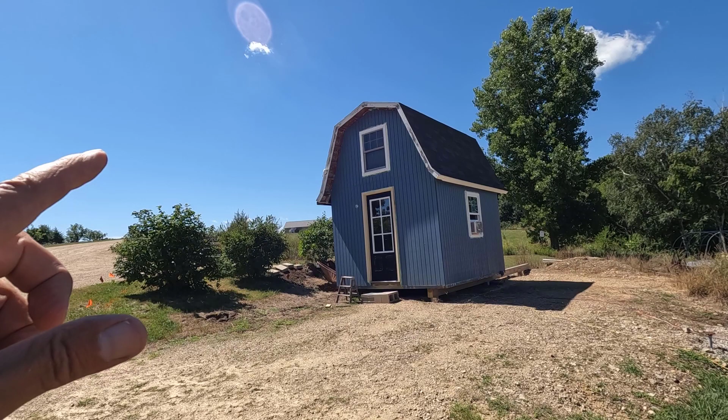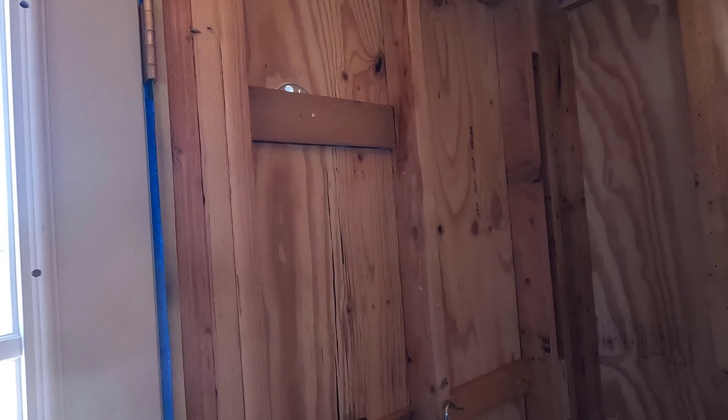Today is day 2 of the wiring of the lower level south wall of the tiny house remodel. Got the porch light wiring done yesterday, in case you missed that video. That's one of the things we're going to work on today.

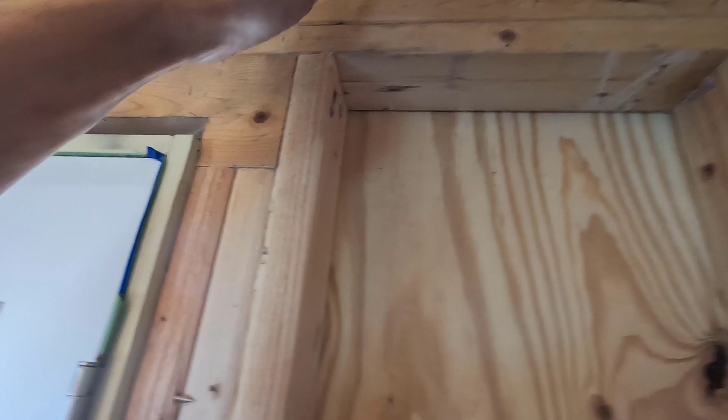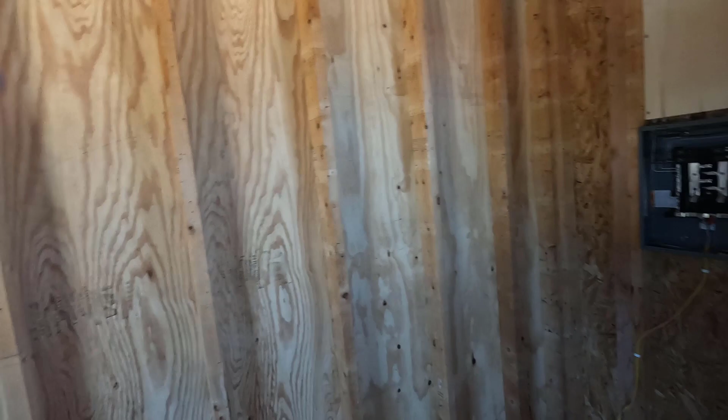We're going to get a wire through there, get it tightened down, and then go up and through into this upper area, and then that'll go over and down to a switch here. I believe that's the first thing I'm going to start with. I may, actually, all of this stuff right here was for locating this hole right here.

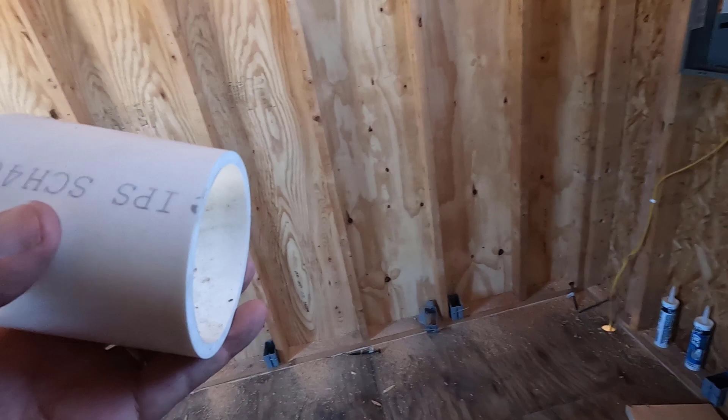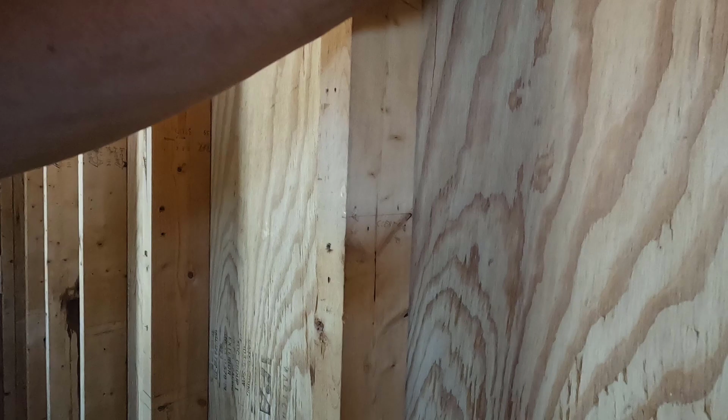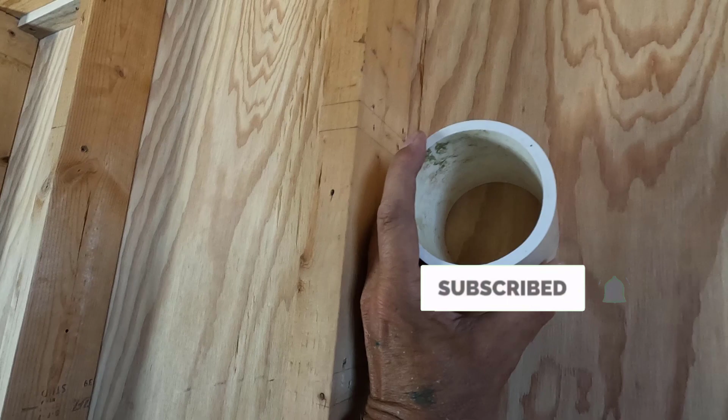And what I'm going to do, I've done this in the house before, is glue this to the wall. This is cut at 5 degrees on either end, and if it's put in there right with this text kind of level, when it's put in there, all I got to do is drill a hole through to the outside,

and then once this is fastened in place, I'll be able to take a router on the outside and route that out with a flush trim bit, and then I'll drywall over it on the inside, poke a hole in there, and use a roto zip to zip the hole on this side, and then I'll have a perfect passageway for all of the mini split plumbing and stuff.

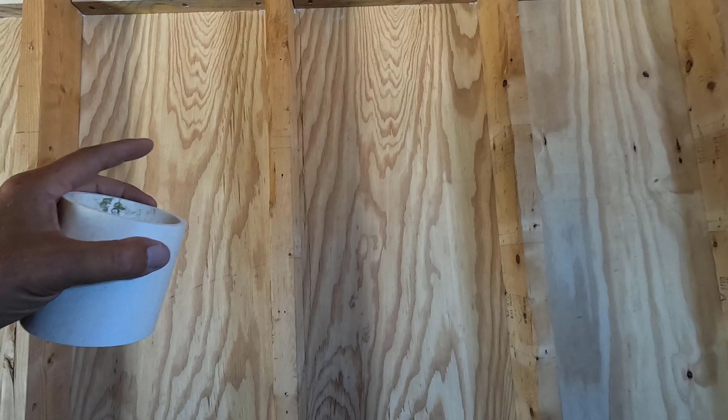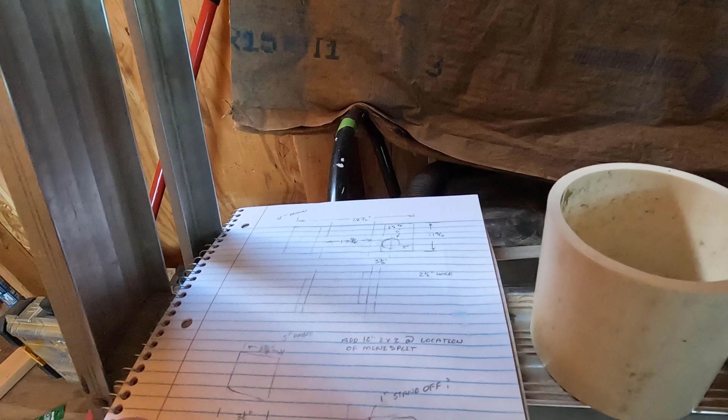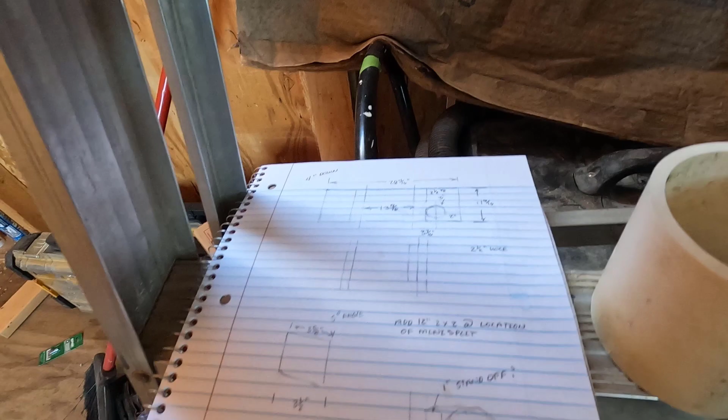I have the brackets figured out as well. I'm not sure if you'll be able to see this or not. Where did I draw that? I'm gonna have to beef up one of the studs and then add some blocking for this. Yeah, we got 13. So yeah, I'll have to figure this out again. I drew this up last night. I got this cut this morning. Figure this out again, and we'll get these blocks in place.

I gotta measure down from where the ceiling is gonna be. It has to be at least 4 inches from the ceiling, and for some reason they never make these mounting plates for a mini split so that the holes are 16 or 24 on center. So I'll add this onto one of the pieces, and then I believe I have to add it onto this side, and then on this side I have to add in these right here.

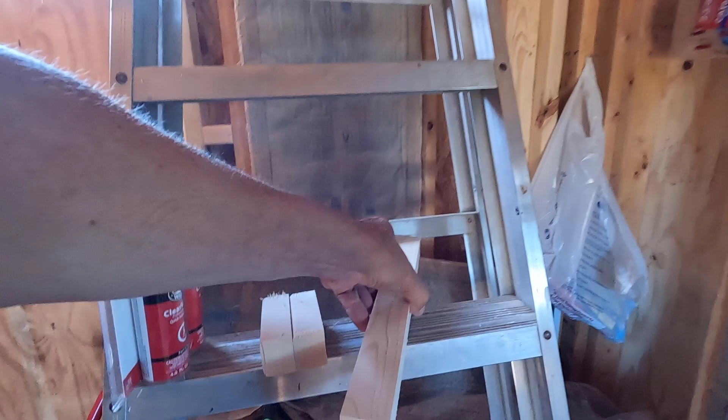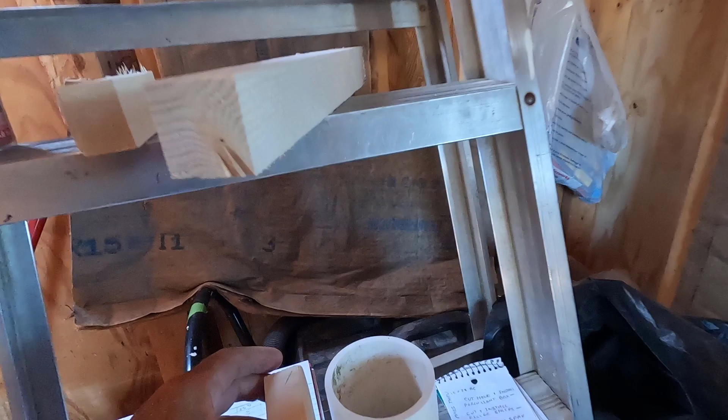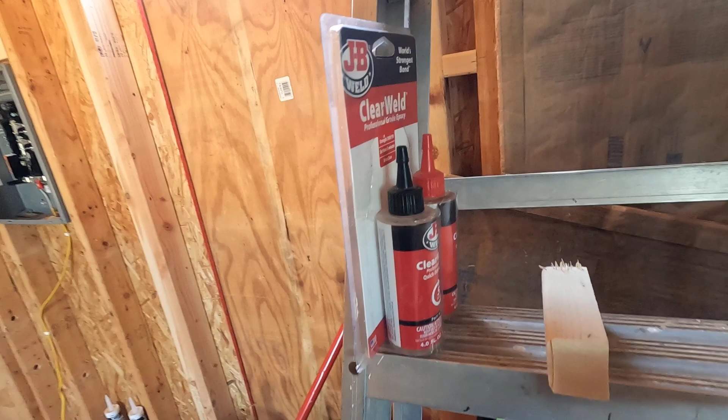These are 1 inch, like that, and then my pipe is going to go right on the edge of that, and I'll throw some strap around it. I'm going to glue it with JB Weld Clear Weld glue. It's just 5-minute epoxy, really strong 5-minute epoxy, and with any luck this won't take too long. This is pretty complicated, so yeah, we'll just do that first.

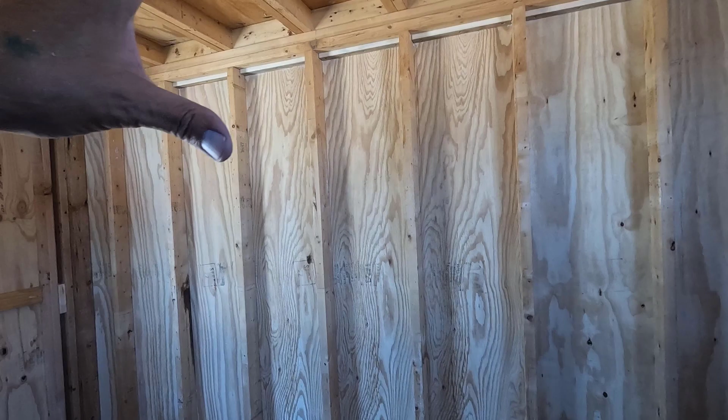We'll get the mini split stuff in place, then we'll do the wiring there. Once all of that stuff's done, I could start pulling wire. I got everything drilled yesterday, so I'll pull the wire, get the boxes in place, and oh, I actually have to get these big legs in place. I got a lot to do today. Alright, let's start by figuring out exactly where this mini split's gonna go and get those blocks put in place.

Okay, I got this all done. These are beef ups for the screw pattern on the bracket. The bracket will come to right about here, and well, actually it might even come past here. That'll be on the drywall though, but the hole centers on this particular bracket, that would be one of the hole centers right there, and they're in a line going upwards.

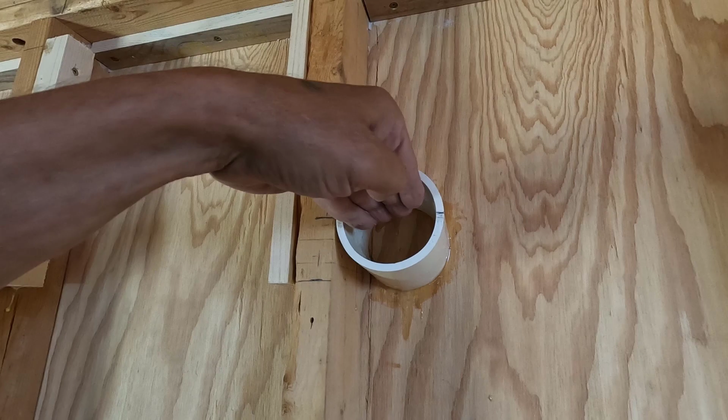And the other one is right at the edge of this 1x material, and we have kind of a messed up stud here, but it's going to work just fine anyways. And then this is the hole where everything goes out. This I'm going to let dry for a couple days. It's 5-minute epoxy, but it gets to full strength, I believe, after 24 hours, but there's no reason to cut the hole yet. So I'm gonna wait till tomorrow or the day after.

And what I'll do is just take a spade bit, drill a hole through the wall from the inside, and then go to the outside, use a flush trim bit, and then just run it around the edge. Then I'll have a perfect hole on the outside. I believe I said this already, but just to reiterate, that'll cut all that glue and all that stuff as well. I'll take some sandpaper and make sure all the edges are nice and smooth,

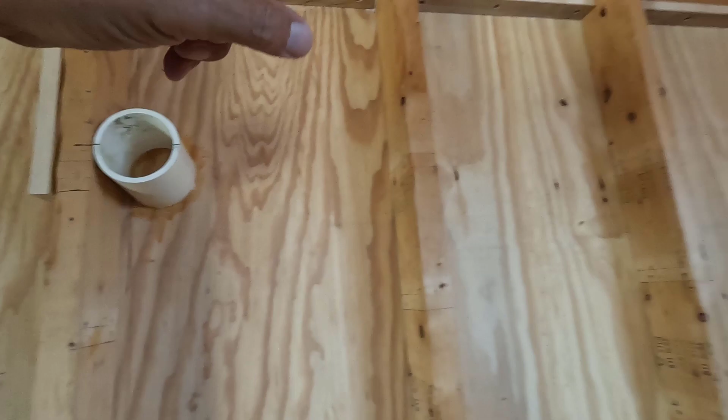get that repainted with the color from the outside, and then once we cover the wall, I'll just take a measurement from where the wall's gonna be, the drywall on one side and the ceiling, and then with those two measurements, I'll drill a hole right through here and then use a roto zip to zip that out. Then I'll have a perfect passage through the wall, and I don't have to worry about insulation, all that other stuff. I'll insulate with foam in these two areas, and then my batt insulation, I'll put that right around this. I'll cut it rounded like that, and it's gonna fit nice and tight.

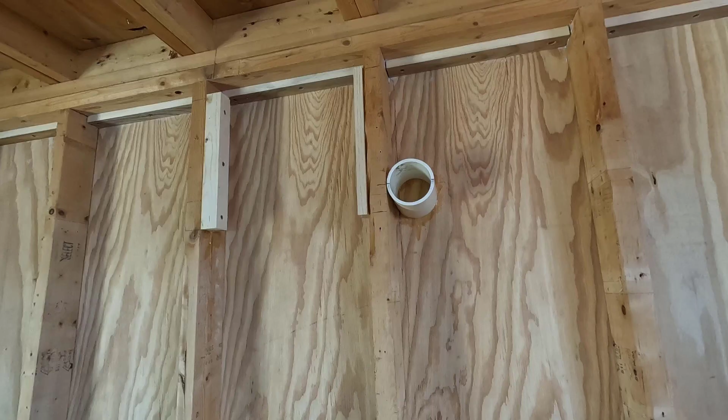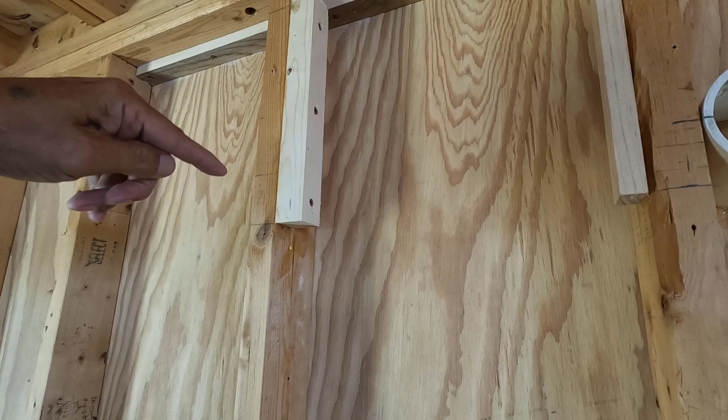The particular unit that I'm putting in here is a Pioneer 9000 BTU. They go all the way up to 36,000 BTU, and I believe they have 4 different brackets. The bracket goes over the drywall, so this is not the bracket, this is just blocking so that the screws that hold the bracket to the wall go into something substantial. You can also use drywall anchors, but I don't trust drywall anchors. I want to screw into something substantial like this.

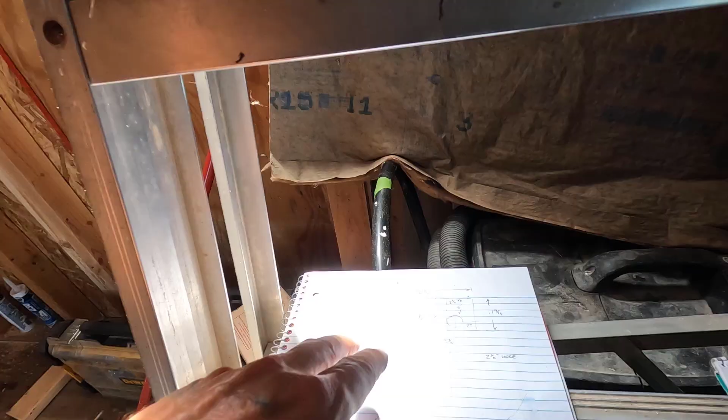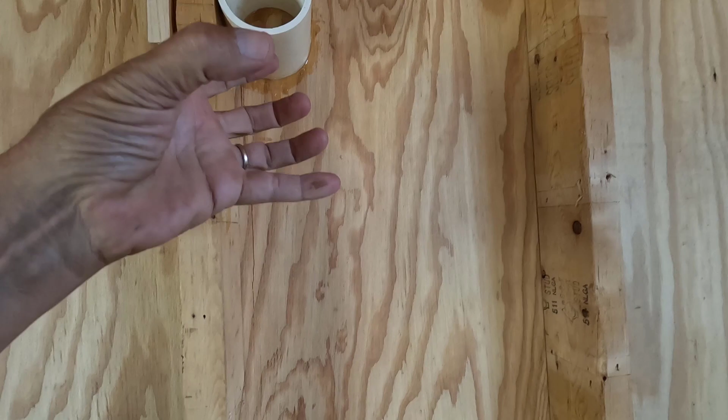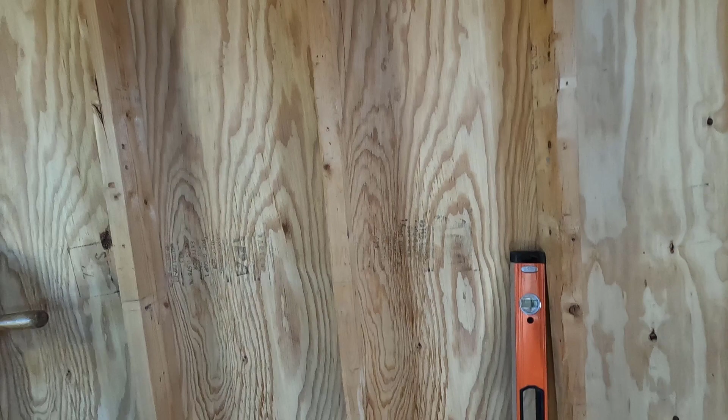And again, usually you run the lines through and then bend them, and then they go down and they go over into the unit on the outside, like the unit would be right there. In this case, the lines are going to go down to the bottom of the building, they're going to go to the corner and around the corner, and the unit's going to be right here. Most of them come with about 16 feet of line. This right here is 6 feet, and then we have probably just enough to get to the unit with the lines that they supply with it. Okay, enough about the mini split for now, but we will come back to this and I'll show you everything when I install it as well.

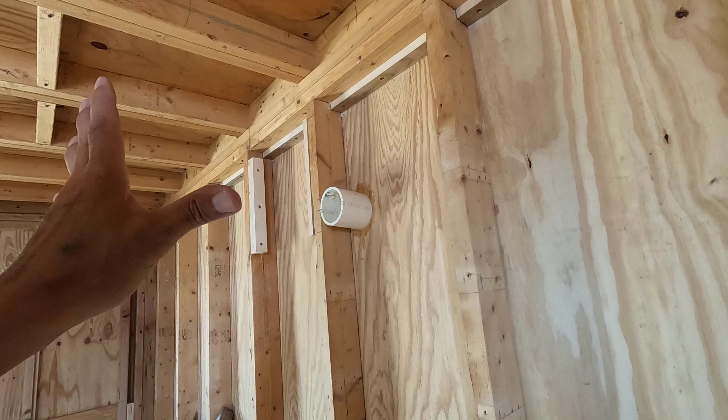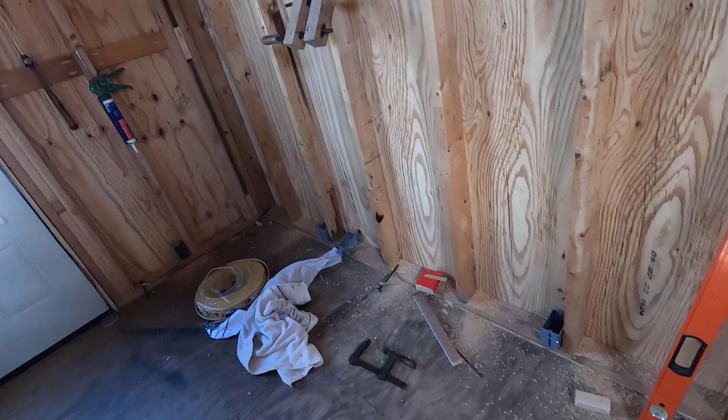Oh, and to reiterate, this gets no electricity right here. Wherever the unit is going to be outside, that's where you run the electrical to. So this will have a line coming down, it'll go through the wall, and we'll have a 30 amp shutoff out there, and that'll power the unit, and then the unit itself sends the electricity through them lines back to the interior unit.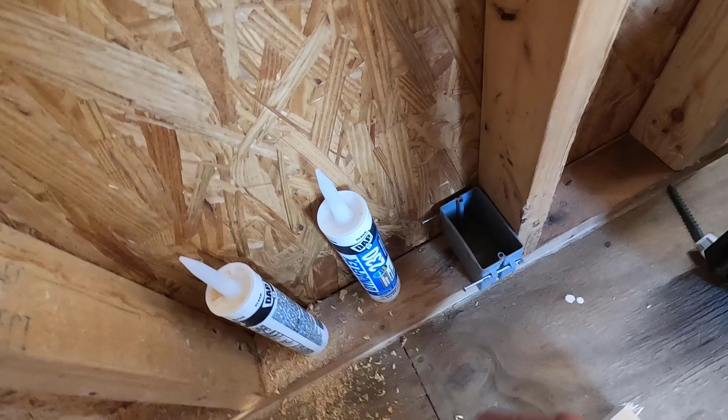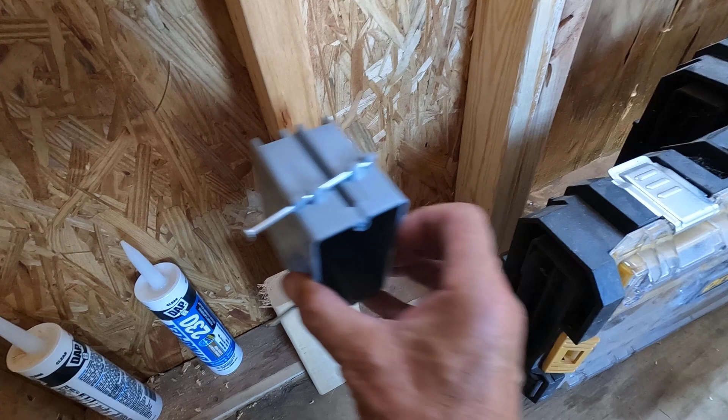Alright, I cut a cripple, and what that's going to do is just sit on the floor like this. I have some caulk right there, so I don't want to sit it on the caulk. What am I doing? And that's how I locate the boxes. The boxes generally have a little tab on the side so that you don't go too deep with them. I believe they're going to go about like that. Get the boxes in place, rest it on the 2x4, and then nail it in. I'm going to go around and get all these boxes nailed in, then we'll start running the wire.

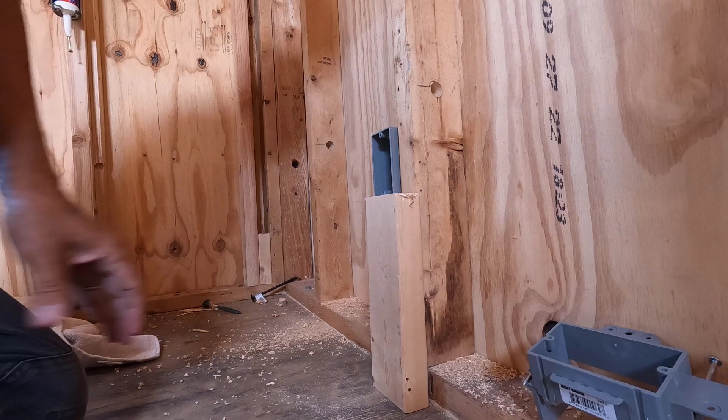So we have a 1/2 inch where there's nothing, and then we have 3/4 of an inch to the center of that. So that is 1.25 inches. So we'll just set the combination square to 1.25 inches.

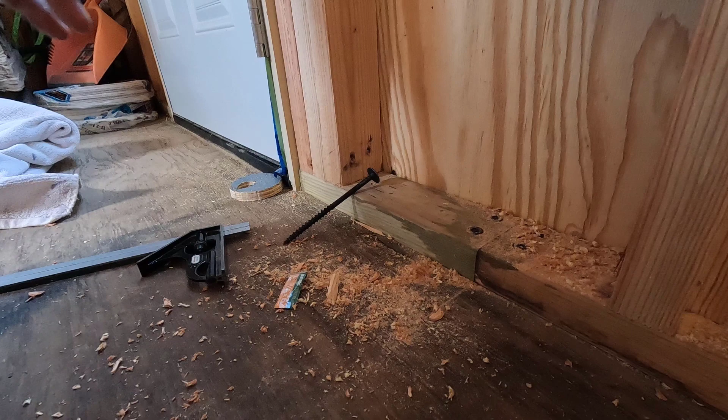And then with these big 3/8 inch spax like this, I like to drill a small pilot hole just so you don't split everything out. They say you don't need to, but when you're driving something that big, especially when you're closer to the end like that, that could crack this board right in half. So we're going to drill a bunch of pilot holes, but first we're going to go around and mark the locations of all these. We'll get all these in and then we'll start pulling some wire.

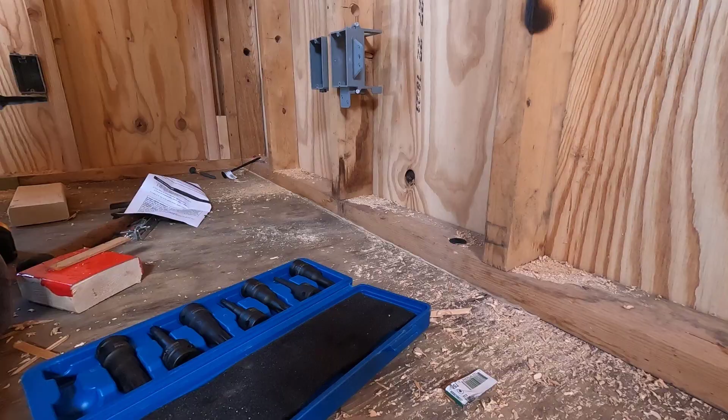This 1/2 inch impact wrench and these 1/2 inch Torx bits really drive these big spax just like butter. Look at the size of these spax. Well, look at this one. What is that? That is a T80. Huge.

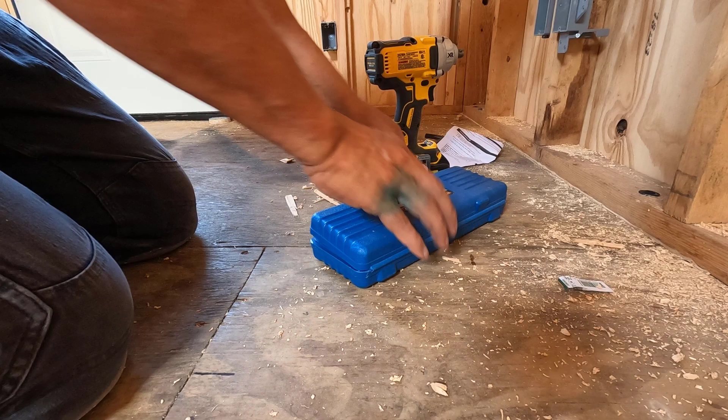Really good stuff. All right, we have all of our spax in place and all of our boxes.

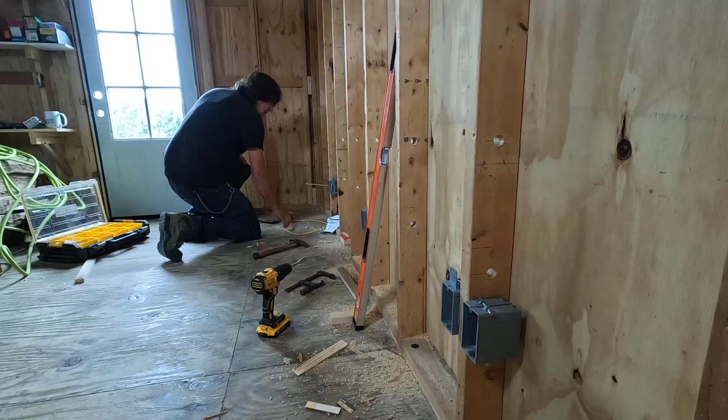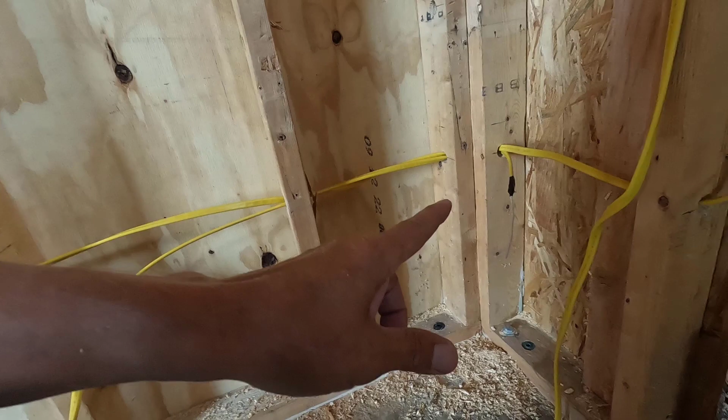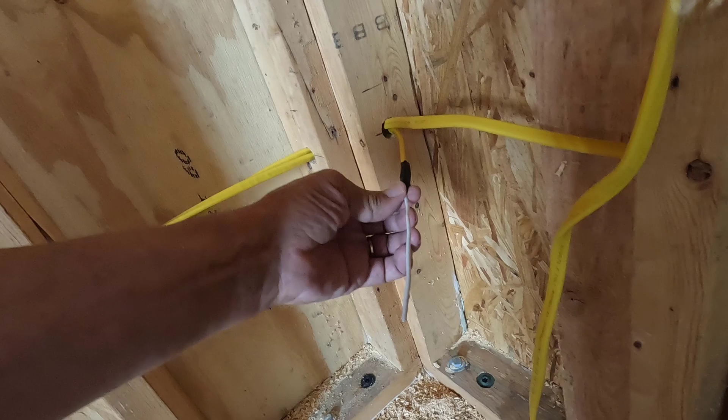Okay, I'm almost done with this wiring. I just need to pull this through the hole here and up into the box, cut this off and get that into this box. But I just wanted to show you how I got this second wire through the corner here. What I did was strip back about 6 inches and then cut everything off but the white wire, and then taped it so that the ends of things wouldn't get hooked on anything.

And then I just fished the white wire into the hole and used my little flashlight. It's real easy to see the white wire. That's why I don't use the black wire. Copper would have been easy as well. But once you see it, use your needle nose, reach in, grab it, pull it through. All right, let me finish this up and then we'll start on the communication lines.

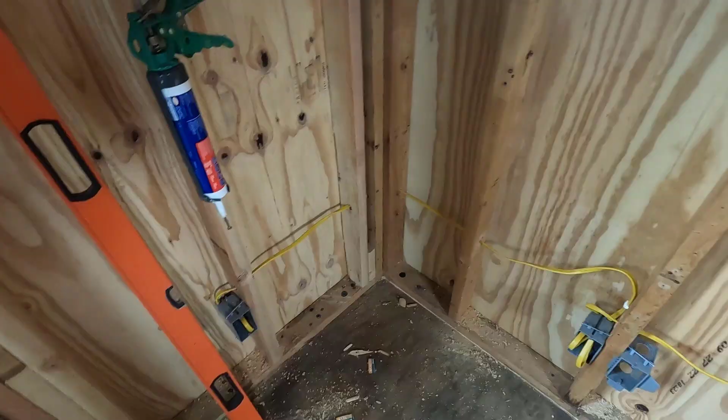Okay, I have the south wall and the southeast wall all wired up. Just got to tuck these in. Now I need to put my Cat 6 through these holes here. We got one going to the low voltage outlet or low voltage box right here, and one going to here. So those are going to go through here, and then up towards the top of this area, and I'm just going to leave a loop

of wire up here so that once I figure out exactly where the equipment's going in here, I can drill the holes and run it right to the equipment. So this won't take too long. Let me get this done real quick and then we'll clean up and wrap this up.

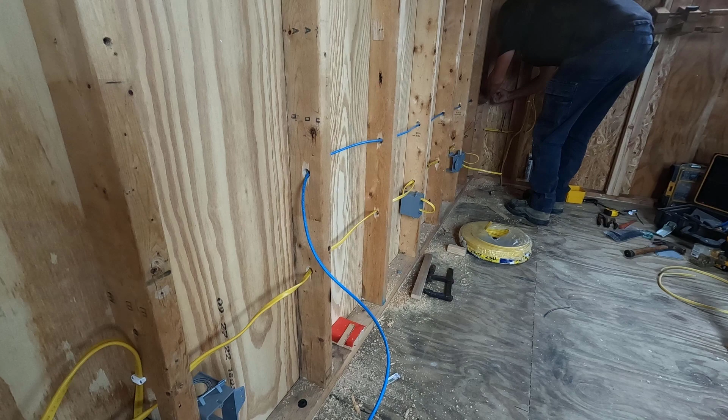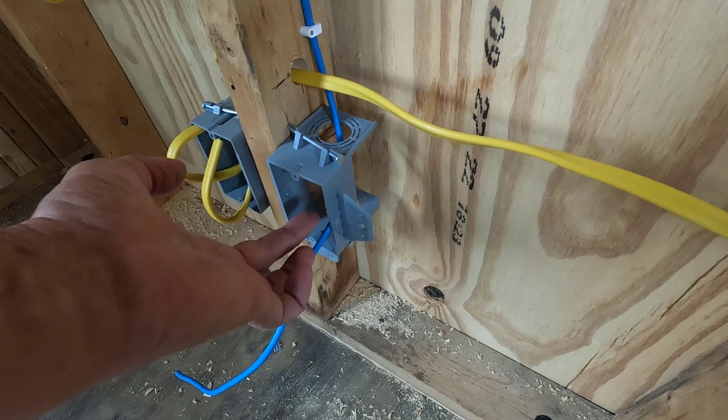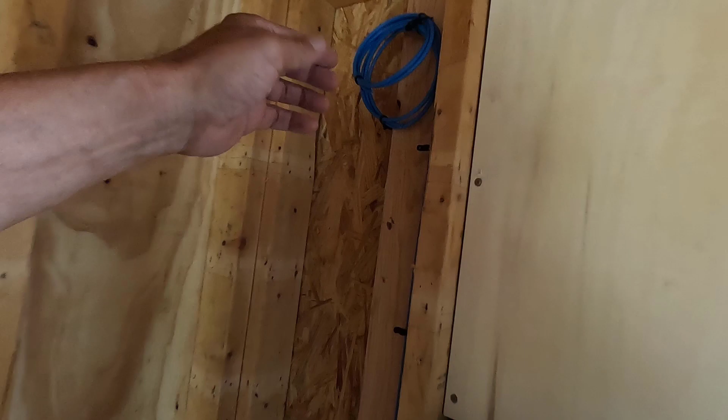Alright, the communication lines are done, and if you've ever seen these, this will just have RJ45? It'll just have a plug right here. We'll connect that wire to the plug, and same thing on this end. So the wire will have to be fed through, then we'll put the plug on there, and it'll plug right into the router, which will be right here.

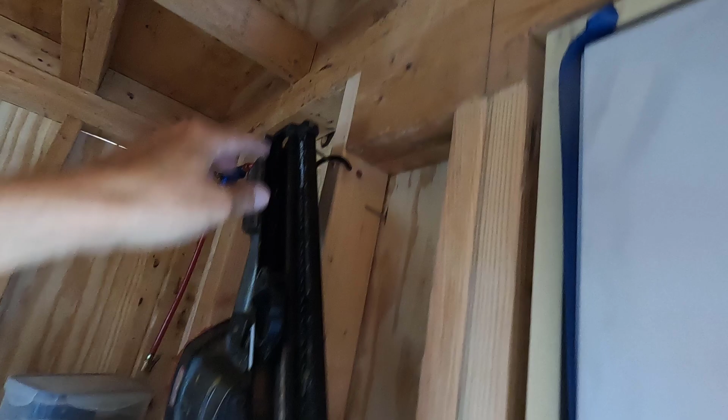Okay, I thought I was done. I was going to start cleaning up, but I still have this. Where is that? Got a hole going through here. We got to get a wire going to the porch light, and I'm not exactly sure. I guess I can staple it all the way across, and then we'll just move this and hang the coil, that coil right there.

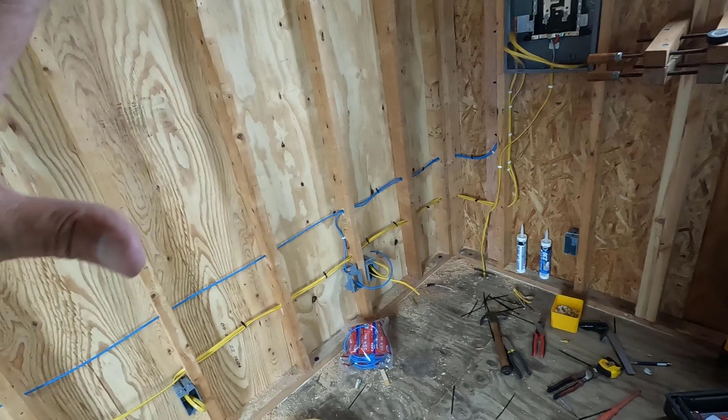Hang the coil right here because we don't have any of the rest of that ready. Once I get the box put here, I can run the wire down here and across over to the box, to the switches there. So let's get this wired up and then we'll get this cleaned up, and next thing in here will be getting the insulation back in the wall, and then we're gonna move to this wall.

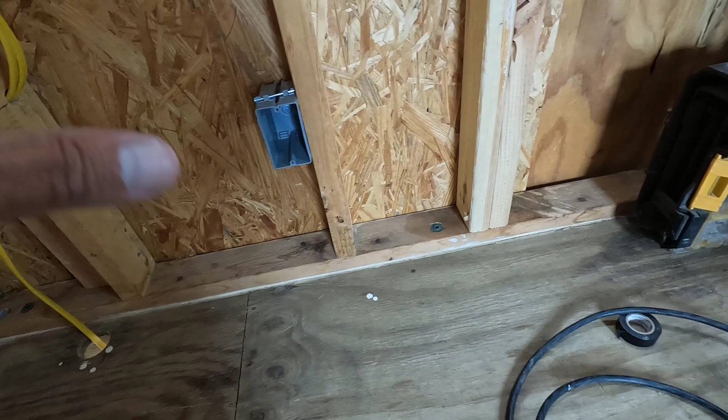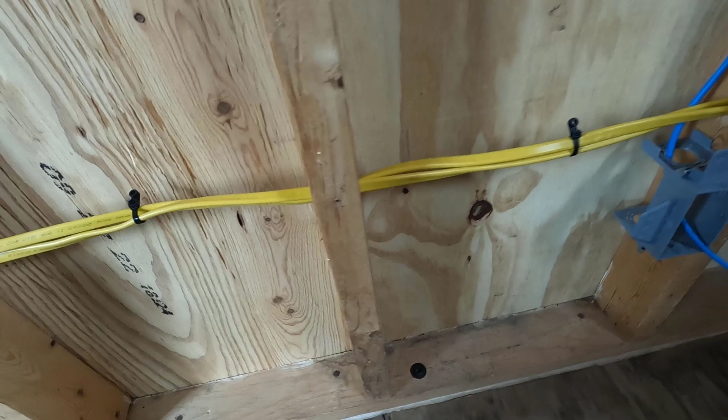Holy moly, I was vacuuming and then I remembered one last thing that I need to do. I need to get some caulk on this bottom edge right here. I don't think there's any way for critters to get up through there, but I'm gonna make sure. The tiny little ants can get through the smallest of spaces, and any place like this where there's a crack in the wood or the ply is being held out by something. It doesn't look like any places are bad enough for ants to get through. But if there is a place, they will get through.

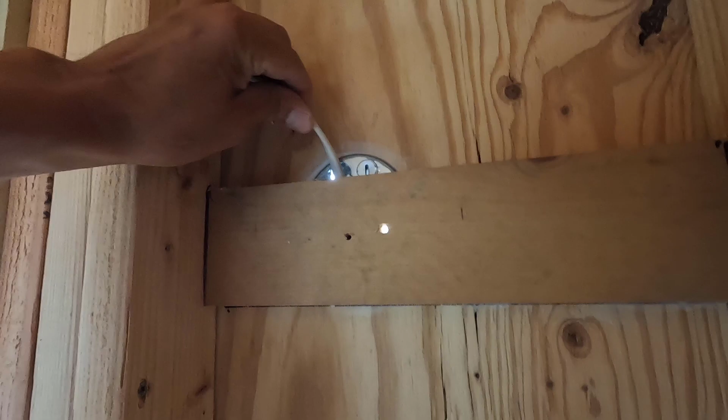So it'll only take a few seconds to go from right there all the way around and get that caulked up. Okay, we are finally done with the south and southeast walls. I don't know if I showed this, but it's like I described. We have a 14-2 wire coming through, going over, and we just have the roll there. We're waiting for the box to go in when we do the other wall.

And I got this all caulked up. I put a good deal of caulk on there and mashed it down into the gap, so we shouldn't have any insect problems. Once I get this closed up and get some boxes in, I'll put in the outlets and wire this up, but until then, it's just going to remain like this.

This is going to be a little bit difficult to insulate. I got the wrong boxes. I got 3-inch deep boxes and I wanted 2-inch deep boxes. I didn't want to run back and get different boxes, so I used these, and what I'm going to do is just use spray foam behind them, and once I get the wires stripped, I'll foam the inside of the back of the box. I only need like 1 inch worth of this box, so we don't want to waste all that.

You know, this is going to be a very cold wall, and if there's nothing back here, this receptacle would be freezing cold. But we'll get that insulated as good as possible. And we have other stuff like these communication boxes. What I'm going to do is cut some rigid foam and put it in right here, and then foam the back area with spray foam, and that'll take care of most of this. I'll probably foam the inside as well.

Again, I don't need all that much room, but I do need a box there. I think they make thinner ones than this. This has all this stuff here for the flex conduit. That's what we did in the main house. We ran flex conduit to all this stuff, so you can swap out the wires at a future date. But we're not going to do that here. So it'll be interesting insulating this, but it's not going to take too long.